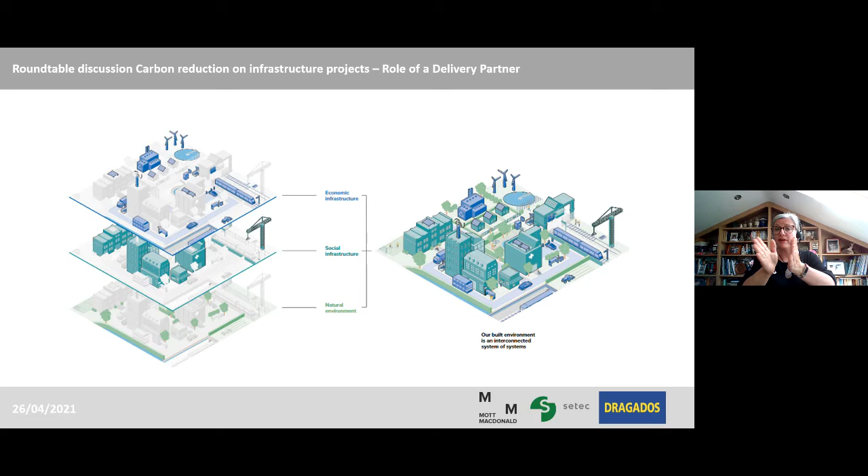It's about having a transportation solution rather than moving down our different silos, concentrating on what's going on. So again, working as an interlinked delivery partner is incredibly important from that perspective. So moving on in terms of infrastructure, as I said, in the UK, the emissions from infrastructure are continuing to go up.

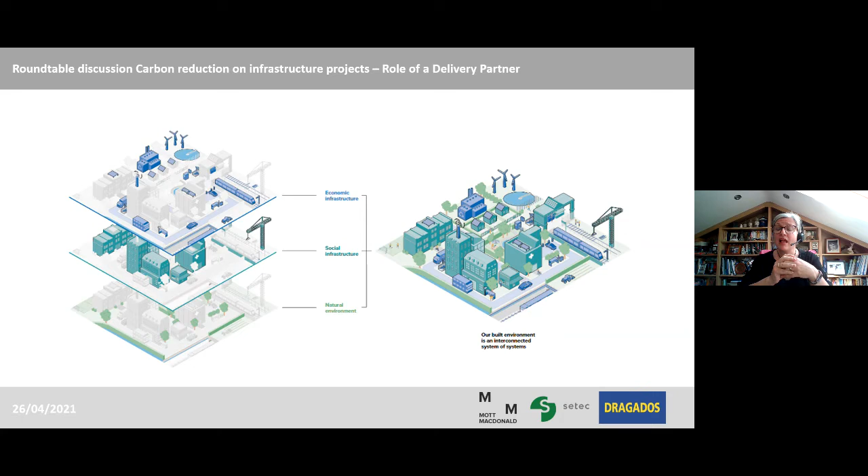So again, we have a role to do that. And when you look at the infrastructure project life cycle, you'll find that you have the greatest opportunity to influence right at the beginning. So in an ideal solution, we would be building nothing. However, that's not always possible, because again, you're looking at it in the round and you're looking for those sustainable solutions, particularly within transport.

But as you move down the project life cycle, those opportunities for carbon reduction get harder and harder to implement. So certainly thinking as a cohesive team, working with early contractor involvement, etc., when we're designing an infrastructure project is key to make sure that we realise those innovations and those low carbon outcomes.

But again, looking at it in the round, because sometimes when you're concentrating on one thing, you can end up with a perverse outcome. So it's a matter of doing that balancing act. And as I said, as you're moving down the project life cycle, it gets harder and harder to implement that low carbon thinking, that new way of doing things to achieve net zero carbon. And we really are having to think in the round when we're looking at these kind of projects.

So as I said, design, construction, when it moves on to the constructor, it's all about trying to build more efficiently and do things as efficiently as possible to get those low carbon outcomes. My colleagues are going to be discussing that in much more detail and tell you how you can do this in real life. And it's all about the delivery partners working hand in hand together to make sure that we hit those low carbon outcomes.

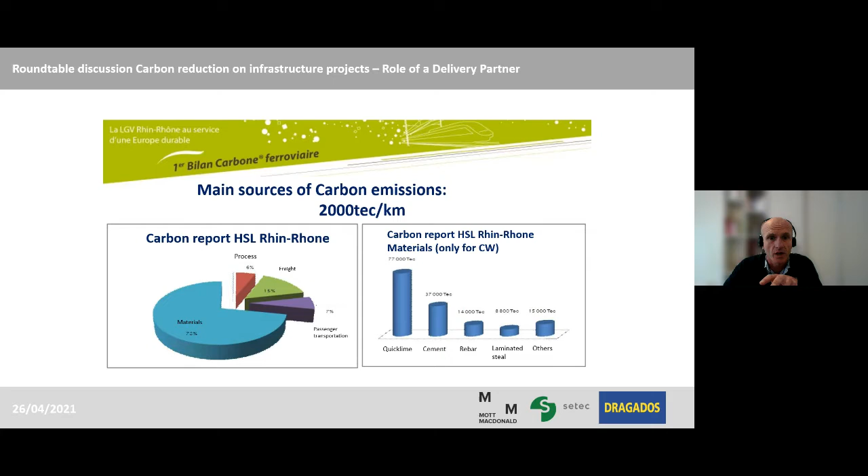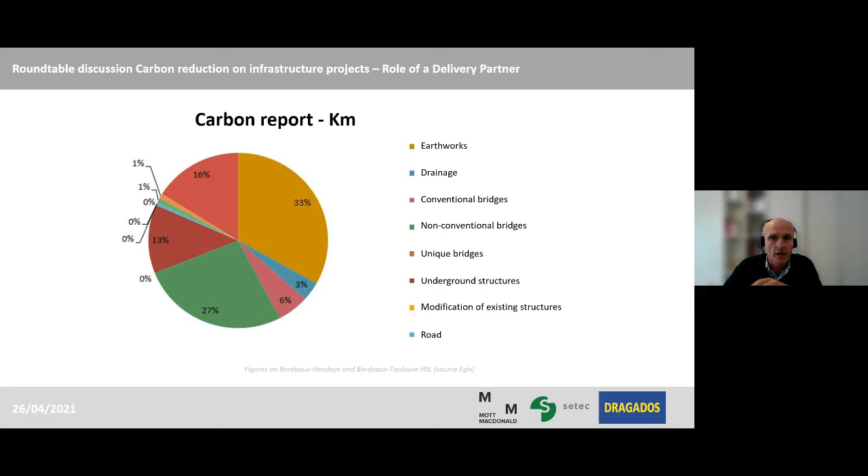So how can we achieve these three objectives? Setec is used to studying different ways in the design. If we start with the first objective, saving concrete and steel, we've got mostly four ways in terms of design. The first way is to reduce the size of structures, if possible. We're talking about viaducts, tunnels, cut and covers, green tunnels, etc.

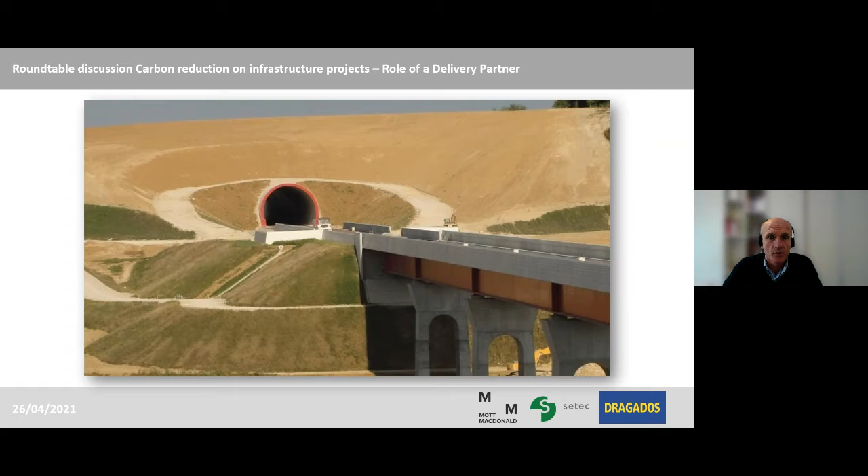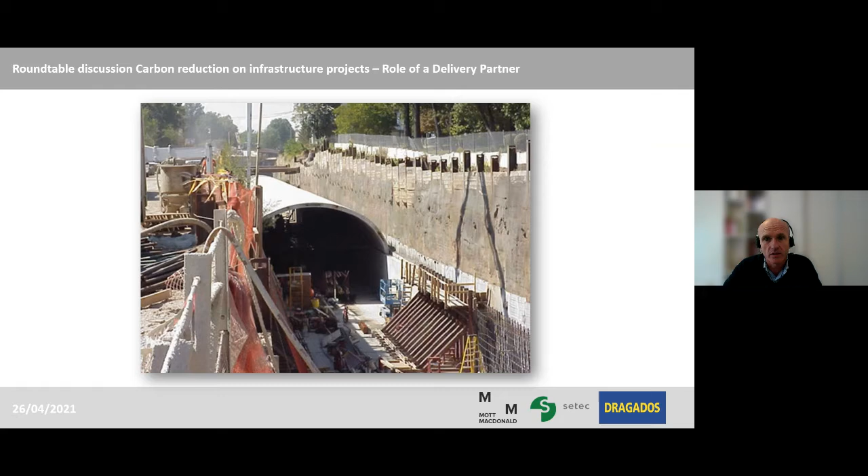But only to the extent that other environmental objectives are met, because this is the issue. We also have to protect flooding areas, landscape for local residents, ecological corridors, etc. So reducing the size of the structures is one way, but you've also got other constraints to respect.

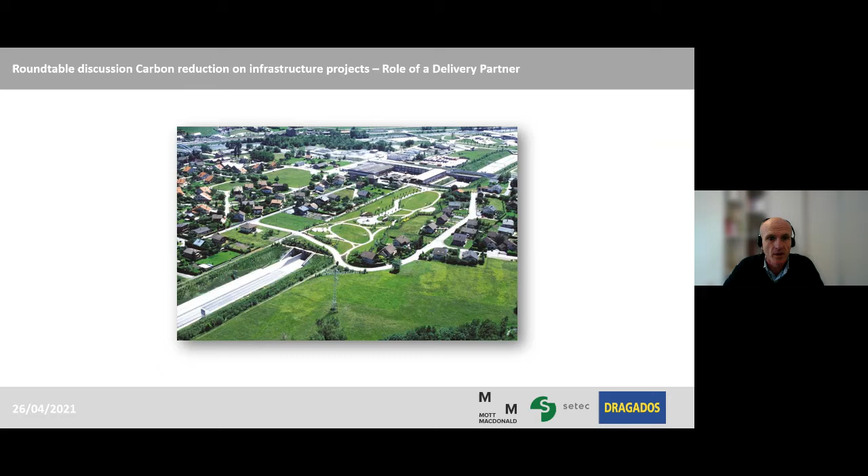The second way is improving the design of the structures themselves, of course, while respecting technical standards and performance objectives over time. The third way is about the drainage system: designing a drainage system that requires as little concrete as possible, again while respecting technical standards and water protection objectives.

And I would say the fourth main way is about track. I think favoring ballast track over slab track is an issue. Even though there are many other constraints to consider, in terms of carbon cost, this is an issue to take into account.

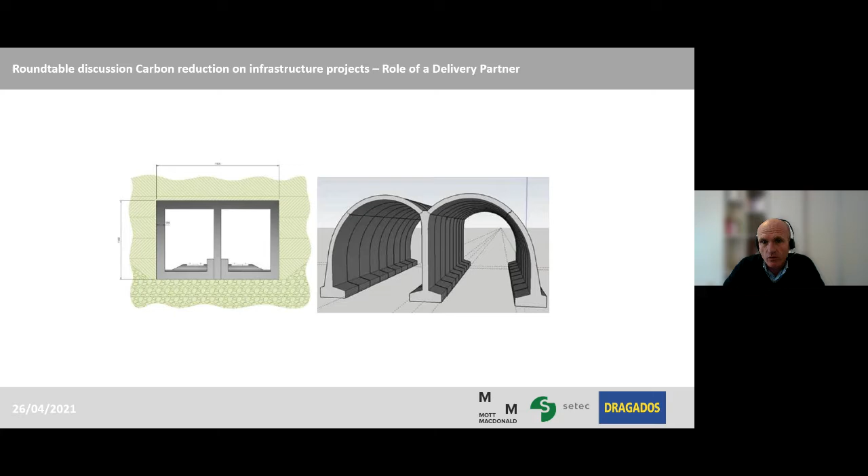So let's carry on with the second objective, lowering material transport. To reduce the mass haul, there are two main ways that are quite obvious. Most designers know that. The first one is to find the best balance between cuts and fills, thanks to a profile as close as possible to natural ground.

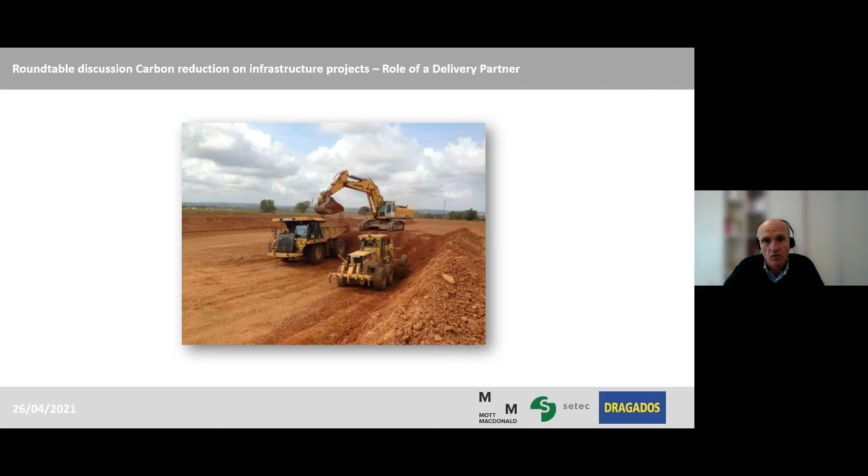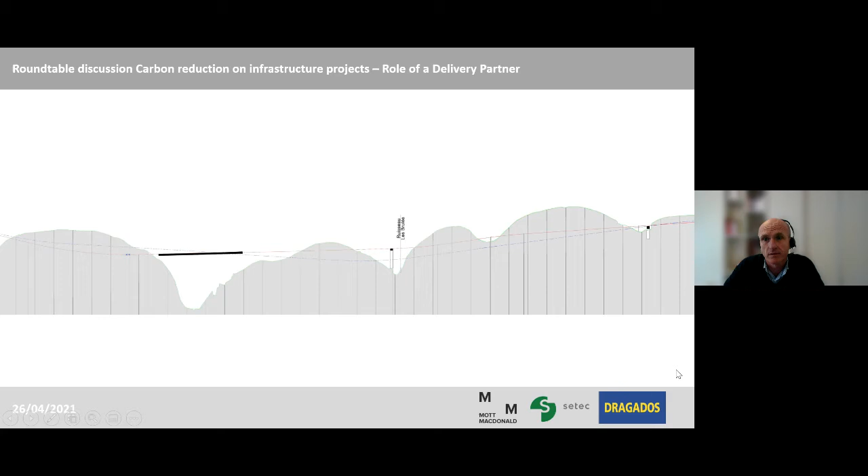However, this leads also very often to a large proportion of treatment with lime, which reduces the gain, as lime itself produces a lot of CO2 for its production. So there is an important issue about that, because at the end of the day, this is what we can say from the lesson learned. For an optimized project, lime is very often the main cause of CO2 emission, as I showed you before.

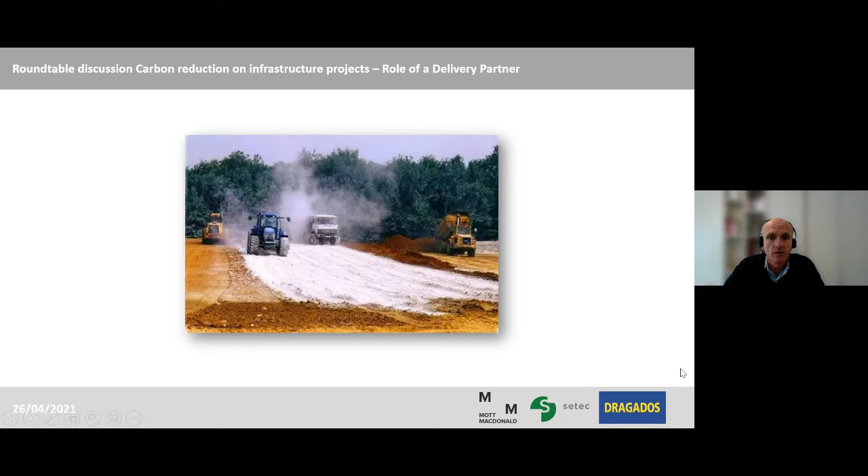So as well, the second way, quite obvious as well, is looking for borrow pits for external materials and deposit for unsuitable materials as close as possible to the track. You can see in the picture there, taken from Canal du Nord in the 1960s, the deposits were at that time put just near the track, which is a good way of avoiding extra mass haul.

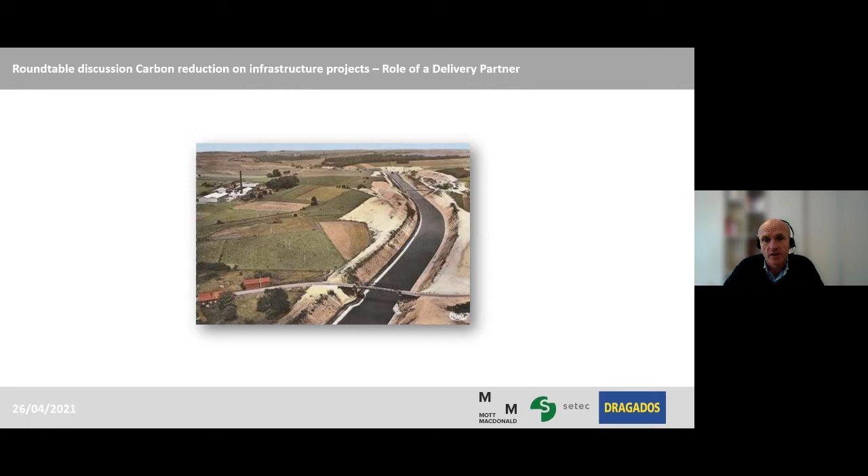Let's talk about the third objective, lowering land use. As vegetation and soil play an important role in carbon storage, switching them to artificial grounds contributes also to CO2 emissions at quite a high level, actually. So in the design, we've got to avoid forest and grassland because they are land uses that give the strongest carbon storage over time.

And as well, we've got to look for a sober geometric design to use as little land as possible. This goes generally hand in hand with a good balanced profile. And this can also concern equipment such as side roads for service access.

So at the end of the day, all these objectives can sound quite simple, actually, but mixing them all together and achieving a low carbon design can be quite complicated, because there are many parameters to consider, some of them potentially going the opposite way of the others. For example, if you think about treatment with lime, would you choose treatment with lime or using extra material from borrow pits? This is a question that a designer can have in terms of low carbon design.

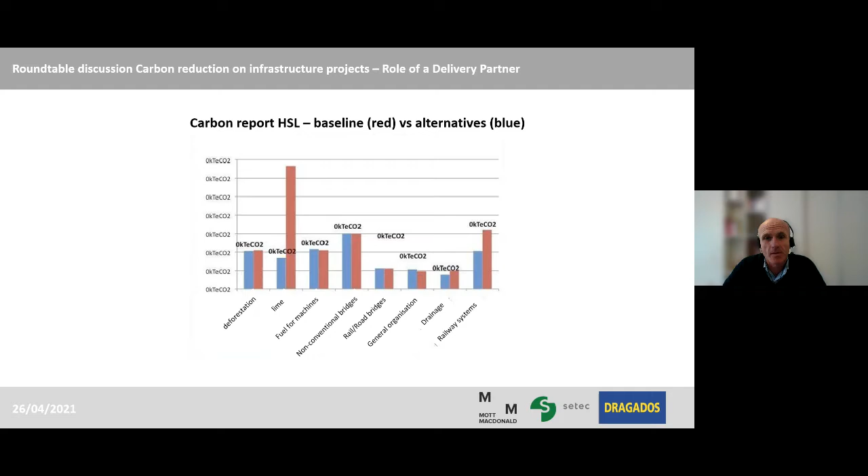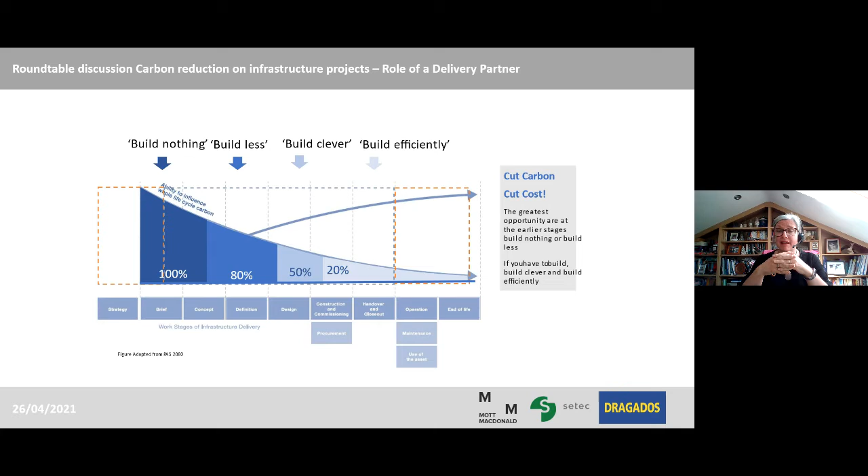So as Yann said, there's an awful lot that we can be doing working together from this perspective in terms of looking at new materials, etc. But it's becoming easier and easier to look at the carbon at the design phase by interlinking it with BIM models. And you can see here, again, you can make those low carbon decisions right at the beginning. And interlinking it with BIM means that you can do that hot spotting, and the designers and the engineers can be looking for that low-hanging fruit from a carbon perspective.

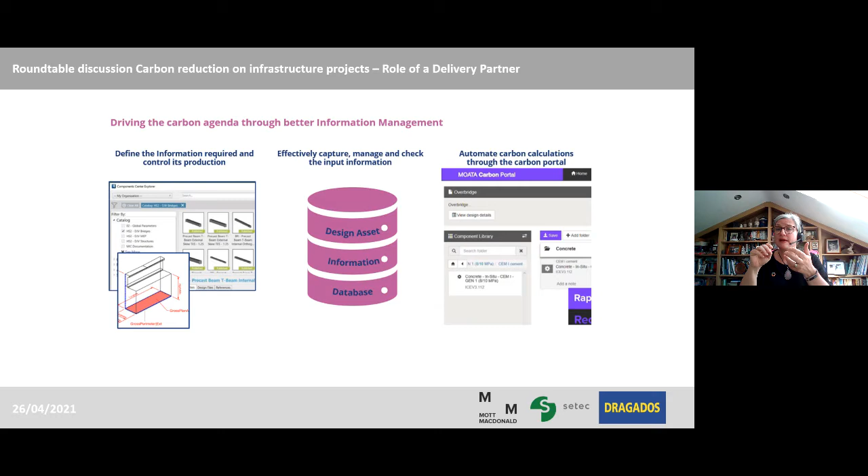So I think we all have our various tools. Within Mott's, for example, we use the Moata Carbon Portal that again allows you to make those quick and easy decisions. But as they say, there's lots of tools out there, but there is no replacement for good designers and good engineering and working collectively as a team.

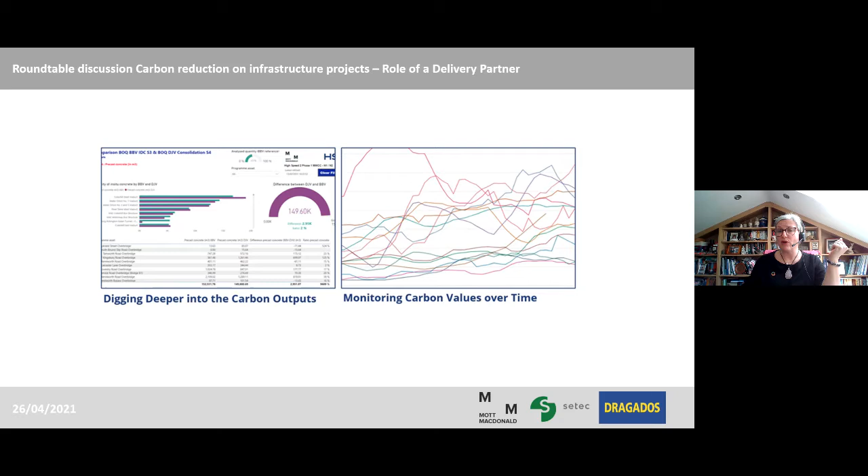Typical for construction projects, we'll have procurement and waste management processes to optimize material usage, to ensure resilience and durability, and minimize waste, including embodied carbon. For example, the selection of low carbon materials and concrete.

We'll also have traffic management plans in place to avoid congestion and increased emissions, as well as keep pedestrian and cyclist routes open and safe for use. We will also establish protection zones around adjacent carbon sinks, such as trees and topsoil, to avoid damage or impairment. In fact, utilization of existing vegetation for erosion and sediment control can help protect existing carbon sinks, as well as reduce costs for things like silt fencing and soil blankets.

In cases where trees need to be removed from the project footprint, typically these are replaced at ratios of anywhere between 1:1 and 8:1, which is an excellent opportunity to significantly offset carbon emissions for a project. Soil movement also has a major carbon footprint, as Yann was mentioning. This is why we established procedures for optimizing the reuse of excavated soil along the project alignment, or arranging soil relocation agreements with other projects such as backfill for bridges, roadways, and building construction. This cuts down on cost as well as carbon emissions.

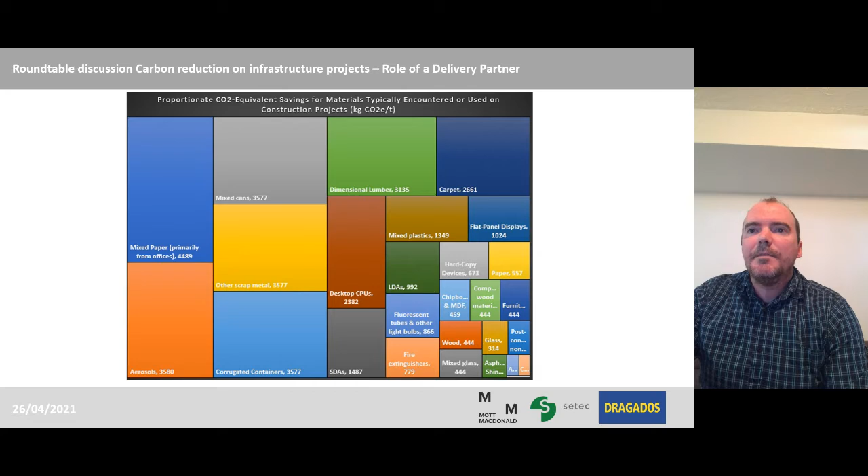For procurement of services and materials, sustainable policies are usually embedded into contractor selection and procurement processes in an effort to select providers with lower carbon impacts. This can be measured using local providers to reduce travel distances, use of ISO 14001 certified suppliers, and reviewing statements made in suppliers' corporate sustainability reports. Incorporation of quality management standards is also a part of it, with the requirement to select products and materials that are durable and resistant, which will withstand operational requirements and pressures, thereby minimizing efforts and energy for maintenance and repairs.

For example, concrete can be a major contributor to carbon emissions. Options are available in the market for low carbon products, which consider alternative or recycled cementitious materials, locally sourced or recycled aggregates, and closed production systems that incorporate carbon capture. Construction teams will work closely with design teams to ensure that low carbon concrete is considered on the project without sacrificing specifications for safety, durability, and resilience.

Sustainable procurement policies also help us with certification against mandated or client requirements such as LEED, CEEQUAL, BREEAM, or in Canada, Envision certifications, which are becoming more commonplace in industry. And so having a procurement policy helps to ensure that low carbon materials are being supplied by vendors and we can achieve that certification. Finally, having a procurement policy is also an opportunity to raise awareness in the industry on rising expectations to reduce CO2 emissions in construction throughout the supply chain.

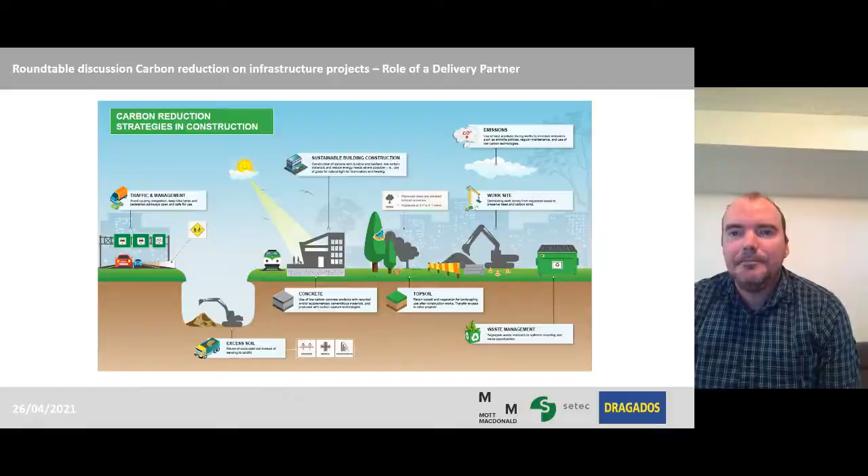Thank you, Ryan. I think what I'd like to get across in the close of our discussion here is that it is incredibly important to be thinking in the round and working as an integrated team to get those carbon reductions in there early. And certainly I've been doing this kind of thing for a very long time, and that's where I've seen the best results. It's an iterative process with the designer working on optimization and the contractor also presenting innovative solutions, etc., and making sure that that is taken through to construction.

I cannot stress how important it is to be integrated, not just from the design perspective and the contractor perspective, but with the project owner as well. And this is all in line with the publicly available standard 2080 that sets out nice and clearly the guidance to manage carbon in infrastructure. And it's about engaging the whole of that value chain to get the best results in this low carbon world.

So I'll pass across to you, Carole. Thank you, Kim. Thank you, Yann. Thank you, Ryan. Very informative stuff. So now we're going on to the Q&A. We've got quite a few questions, so I'll try this one.